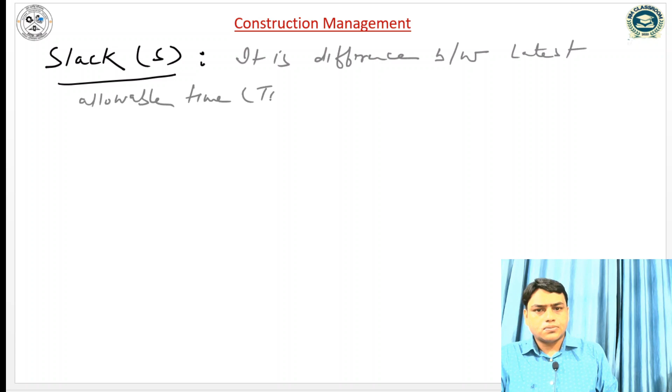So slack is the difference between the latest allowable time and the earliest expected time of an event. The slack can be written as TL minus TE. This is called slack.

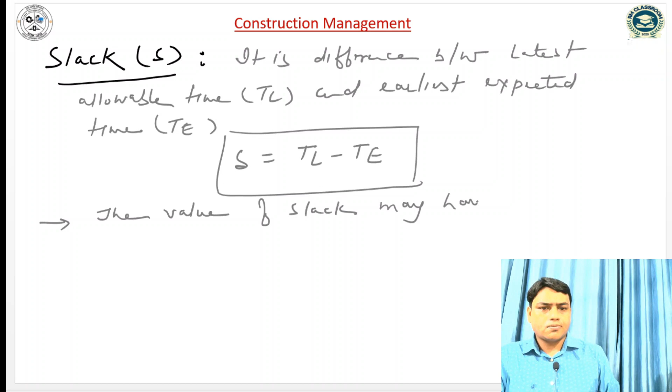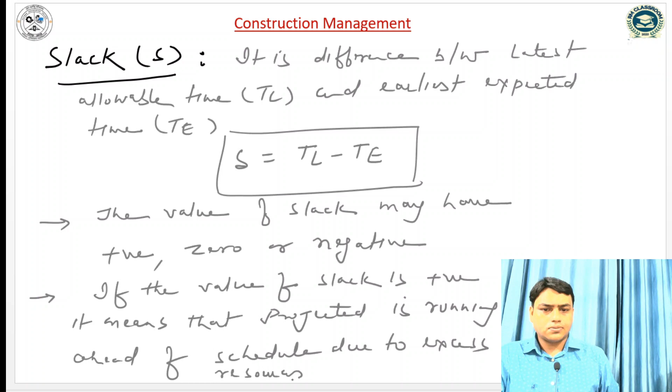The value of slack may be positive, 0, or negative. If the value of slack is positive, it means that the project is running ahead of schedule due to excess resources available.

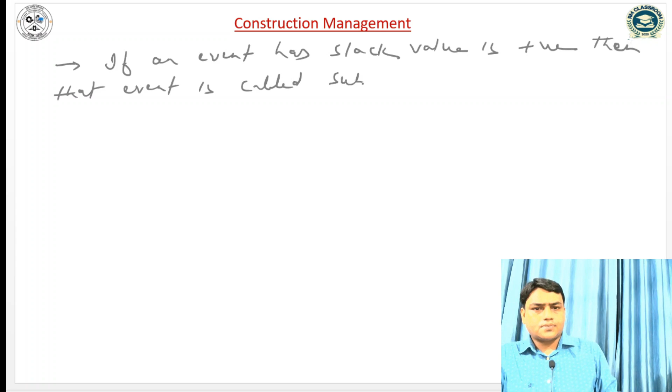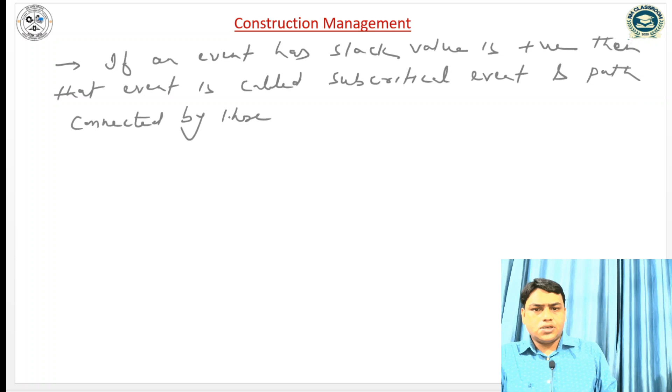If an event has a slack value that is positive, then that event is called a subcritical event, and the path connected by these events is called a subcritical path. This means for subcritical paths, all events should have a slack value that is positive.

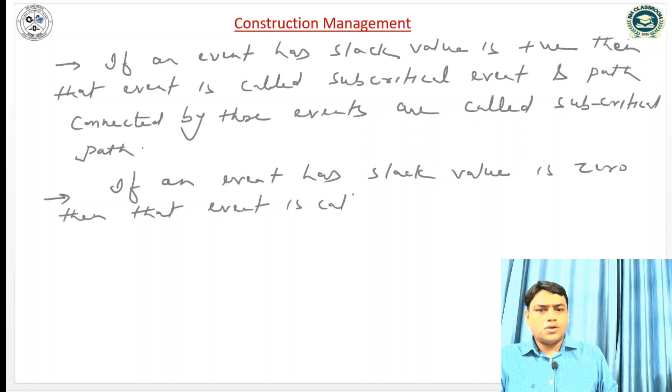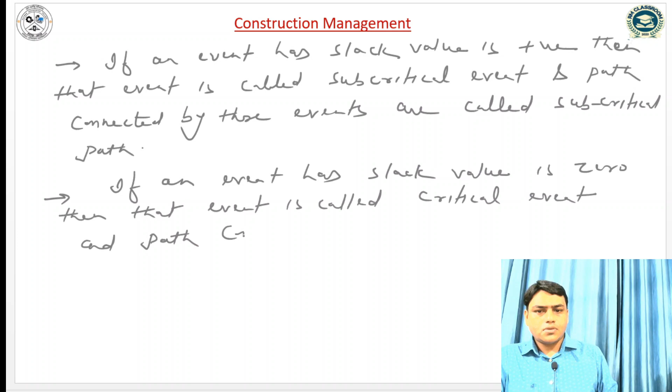Similarly, if an event has a slack value of 0, then that event is called a critical event, and the path connected by these events is called a critical path.

If the value of slack is 0, it means the project is running on time.

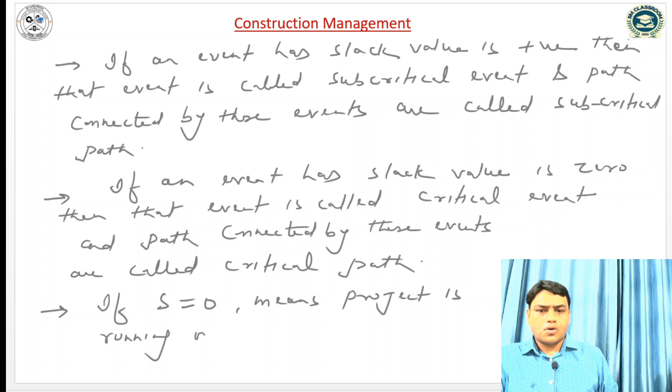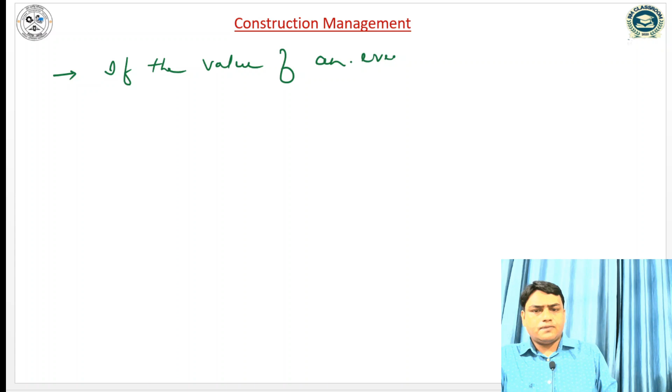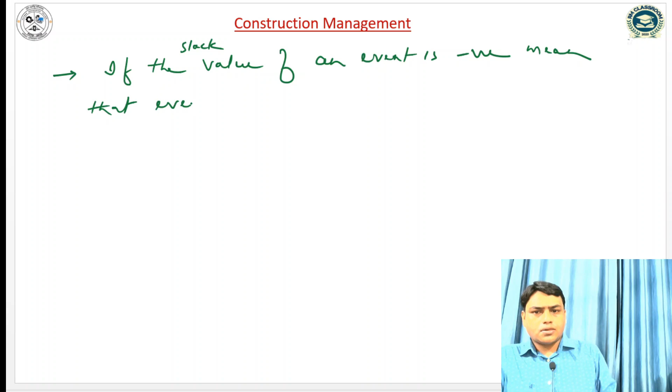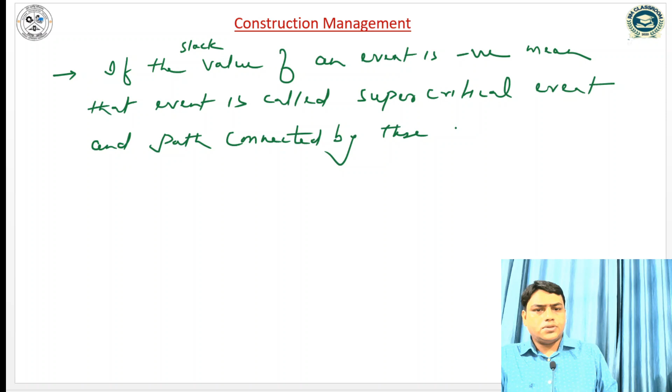If the slack value of an event is negative, it means that event is called a supercritical event, and the path connected by these events is called a supercritical path.

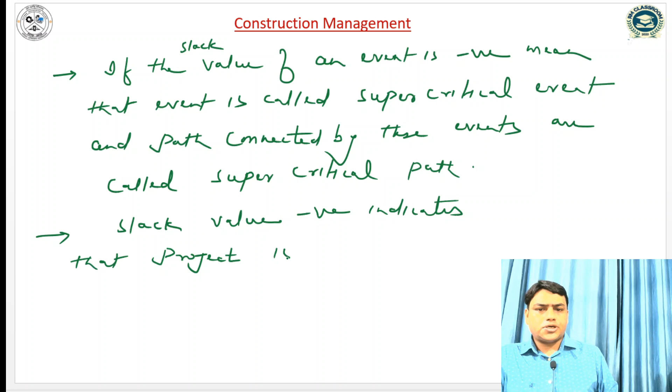A negative slack value indicates that the project is running behind schedule due to lack of resources available.

So this is called supercritical. If any event has a slack value that is negative, it means that event is called a supercritical event, and the path connected by such events is called a supercritical path. A negative slack value indicates that the project is running behind schedule due to lack of resources available.

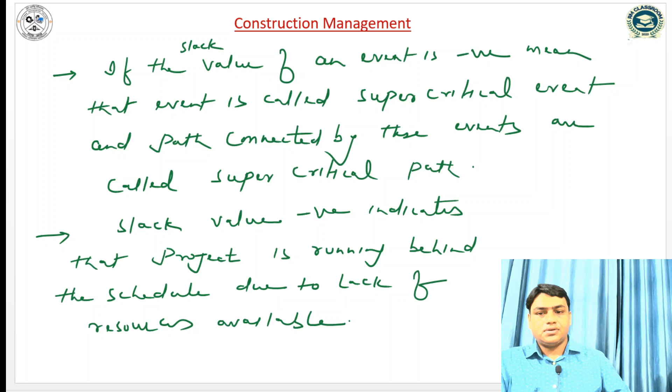Now, once we have decided the critical path, the probability of completion of the project in schedule time can be computed as follows.

First, with the help of the three time estimates, we have to compute the expected time of the activity. Second, with the expected completion time of the activity, find the event time of all the events.

Once we have computed the expected time of each activity, we compute the expected completion time of the activities and find the event time of all the events. Similarly, using the event time, find the slack of all events in the network.

Once we have computed the event time for all the events, we can compute the slack value of each event, because slack value is the difference between the latest allowable time and the earliest expected time.

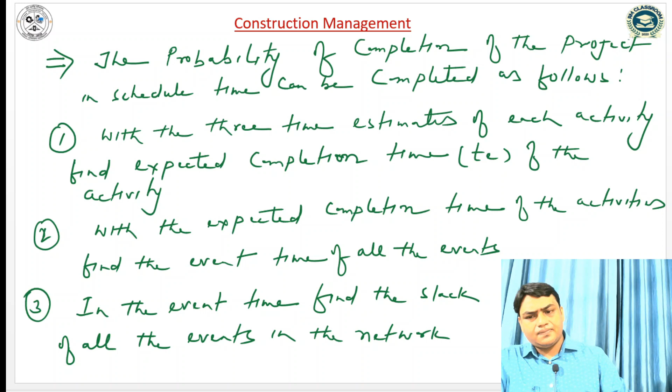The fourth step is to find the critical path of the network and the standard deviation along that path. The critical path is the path in which the event has a slack value of 0. As I mentioned, if an event has a slack value of 0, it is called a critical event, and the path connected by such events is called the critical path.

Once we have decided the critical path, we have to find the standard deviation along that path, and then the probability of completion of the activity in schedule time.

The schedule time is further computed with the help of the probability density function, which gives the expression z equals Ts minus Te divided by sigma, where Ts is the schedule time of the project, Te is the expected time, and sigma is the standard deviation along the critical path. Z is called the probability factor or standardization, which depends on the probability.

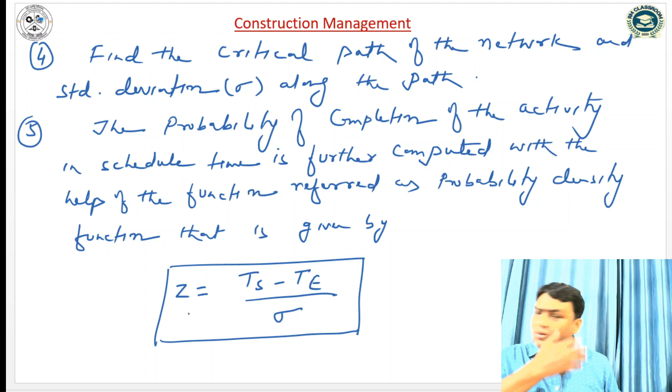So this is the terminology we have already discussed, and these are some important values you have to remember from the competitive examination point of view.

If the probability factor or standardization value is 0, the chance to complete the project is 50%. If the value of standardization or probability factor is 1, the probability to complete a project is 84.13%. Similarly, if the probability factor is 2, the probability is 97.72%, and 99.87% probability to complete the project when the standardization or probability factor is 3.

Similarly, if the value is negative, we know that probability of plus 1 plus probability of minus 1 is equal to unity or 100%. So if we know the value of P1, P minus 1 can be computed as 100 minus that value. We just need to remember these three values. Once we know the probability factor z equal to 1 is 84.13, the probability when z is minus 1 is 100 minus 84.13, which is 15.87. Similarly, if z is 2, probability is 97.72, so minus 2 is 100 minus 97.72, which is 2.28, and for 3 it's 99.87, so minus 3 is 0.13. Beyond minus 3, the probability to complete a project is 0%, because at minus 3 the value is already 0.13, so beyond that it is 0%.

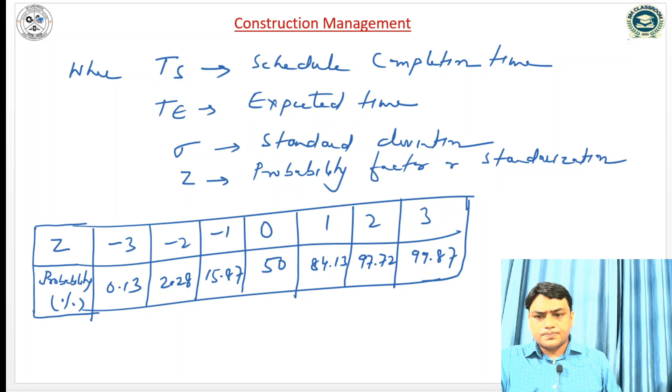Let us take one problem. This is the problem asked in Engineering Services Examination 2010. PERT calculation yields a project length of 60 weeks, meaning the expected time of the project is 60 weeks with a variance of 9 weeks. The probability factor corresponding to 95% probability is 1.647. Then the number of weeks required to complete the project with a probability of 95% is to be found. So we have the probability density function equation. Before that, let me write the expected time of the project.

Expected time is 60 weeks. Variance, that is sigma square, is given as 9 weeks. So standard deviation can be computed as the square root of variance, which is 3 weeks.

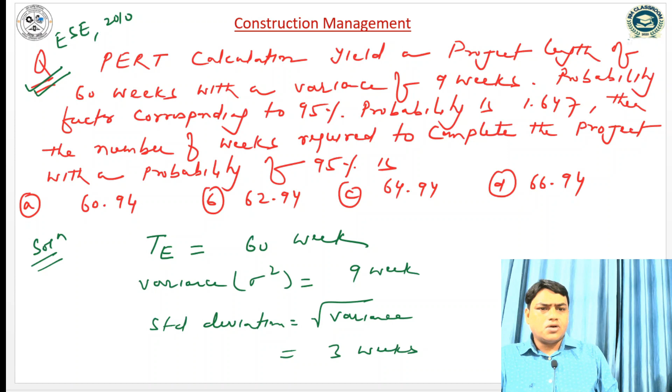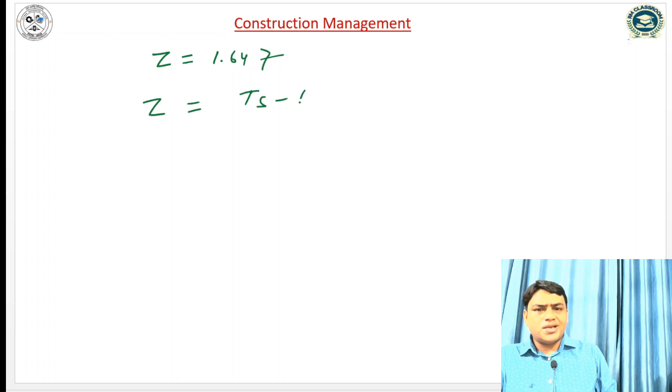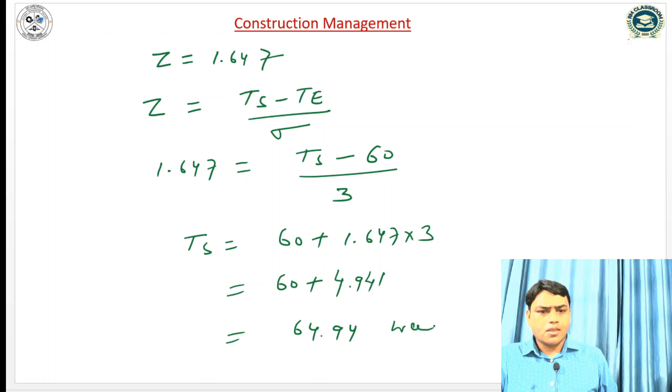We know the value of z is given as 1.647. Z is equal to TS minus TE by sigma, where TS is the schedule time of the project. So 1.647 equals TS minus expected time, which is 60 weeks, divided by standard deviation, which is 3. So TS is equal to 60 plus 1.647 into 3, which gives 64.94 weeks. So this is the answer. Now this is another question I have taken.

The PERT calculation yields a project length of 50 weeks with a variance of 16 weeks. How many weeks would you expect the project to be completed with a probability of 75%? The probability factor for 75% probability is given as 0.732. In the second part, we have to calculate the probability of completion of the project when the scheduled time is 35 weeks.

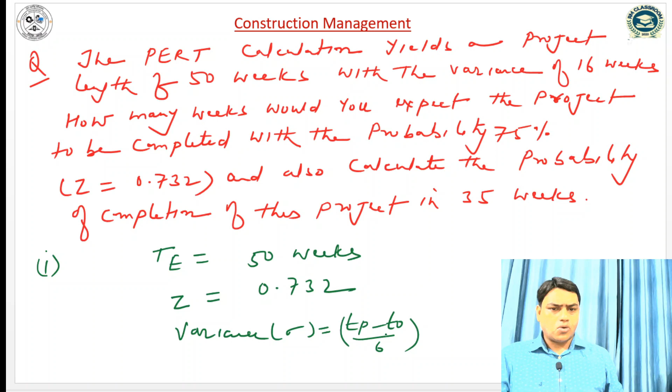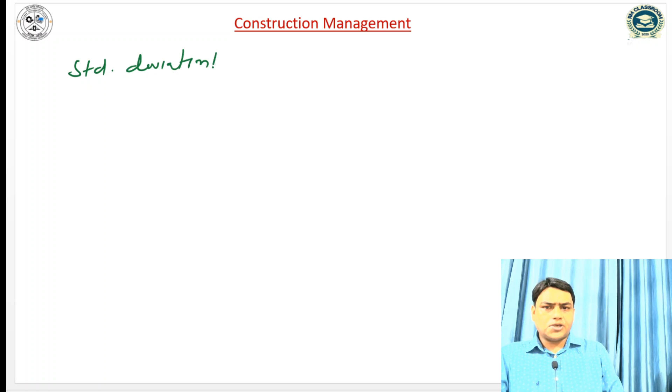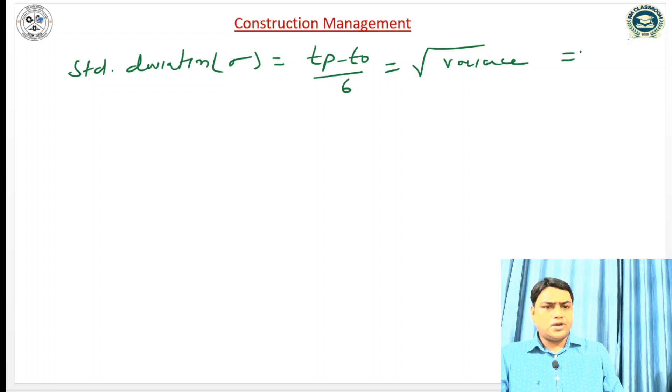For the first part, the expected time of the project is 50 weeks, and the standardization or probability factor is given as 0.732. The variance is given, where sigma square equals Tp minus T0 by 6 whole square, equal to 16 weeks. So the standard deviation, sigma equals Tp minus T0 by 6, is the square root of variance, which is 4 weeks.

So Z is equal to Ts minus Te by sigma. Z is 0.732, equal to schedule time minus expected time, which is 50 weeks, divided by sigma, which is 4. So the schedule time is 50 plus 4 into 0.732, which gives 52.928 weeks. This is the first part.

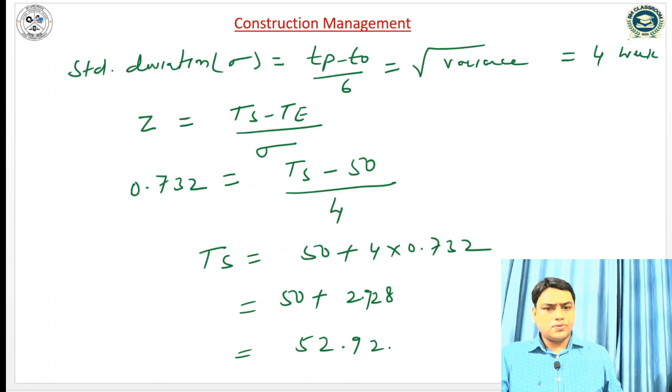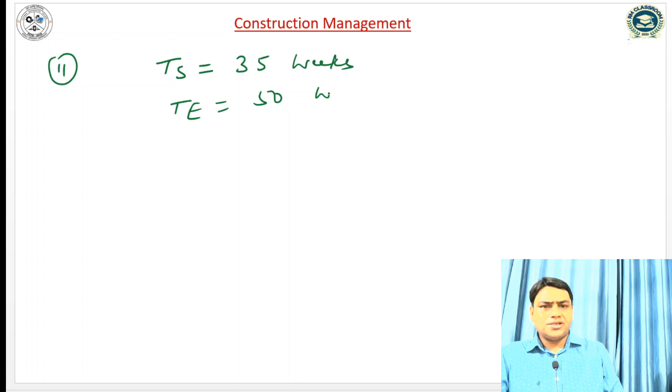Second part: we have to compute the probability when the schedule time is given as 35 weeks, and expected time is as usual 50 weeks, with the standard deviation of 4 weeks.

So if I compute the probability factor, Z is equal to Ts minus Te by sigma, so it will be 35 minus 50 divided by 4, which is minus 15 by 4, equal to minus 3.75.

As I told you, the probability at Z equal to minus 3 is 0.13%, meaning the probability at minus 3.75 is effectively 0. So the probability is equal to 0%, meaning there is no chance to complete the project when the scheduled time is 35 weeks.